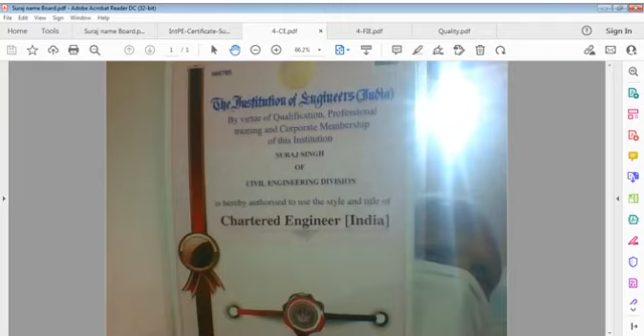I don't claim that these certificates solve every problem. These certificates only indicate identification of some person, and that's what I tell you - this is my only achievement in life. I'm not a very advanced person, not very well internationally or nationally reputed. I'm a very small guy, and why should I say big? I do not get any major awards in my life, but those do not count when quality comes into picture.

When I talk of quality, I talk of soul of world, soul of products, quality in this country and quality elsewhere - we have to consider all that. In our country, everybody knows that quality is not as it should be. It's not seen, it's not experienced, and that's where the problem lies.

In our country, to be very frank, I want to speak something that comes to my mind every day, and every day the mind works differently. But quality remains the same, the level of quality remains the same, you can't change it. Because life is like that, and quality can't be replaced by something else.

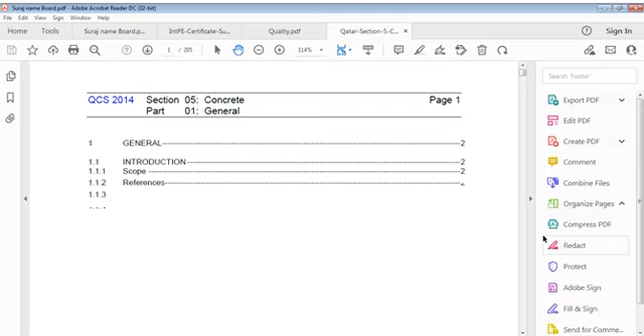Quality requires to be achieved at all levels, and if you can't achieve this, then I can't say that engineers are successful. An engineer may work in design, in planning, in quantification, may work everywhere, anywhere, but remember.

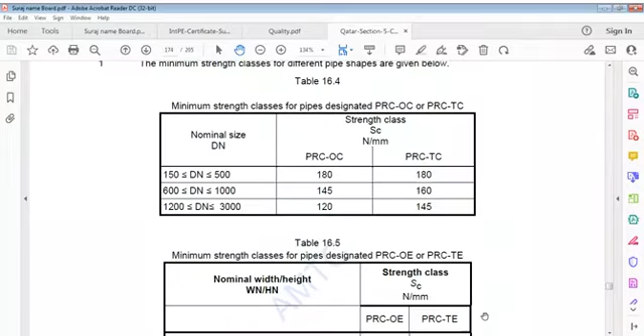Without good designs also, we can't do good work. How can you do designs when you don't know quality? When you don't understand what is quality, how can you do the work? It's a point of concern - we can say a big concern, a point of big concern, and we cannot run away from that fact.

We can say, I'm a design engineer, I'm not interested in quality. Everybody can say that, but don't forget, design is respectable only until it is not implemented on site. It's very much respected because a lot of thought has gone into it before your design is issued, and it's really very much appreciated that the design is excellent. Design takes care of every action on it, every force to come on it, and in all structures.

It takes time, of course. Now it's a computer age - design has the opportunity to be detailed out and tried many times in modeling. But real modeling works on site. We know there are factors of safety we take into consideration.

Factor of safety, which people abuse actually. Those who do not understand the meaning of design, those who don't care about durability of structures, those who don't know that this structure is very important for decades to come - they take it for granted and think let it go on as it is, no problem. We make money. It happens.

I've talked to many people, I've dealt with many people when they come to me, and they used to come to me before also, and they ask me, just give us some idea or give us some layout, don't worry about structural engineering. They simply say don't worry about columns and beams, we'll take care of that, our experts know that. And who are the experts? The experts are masons and carpenters, experienced of course, and they take care of that. So what to do, how to tell people? No, but of course everybody has a small house to construct.

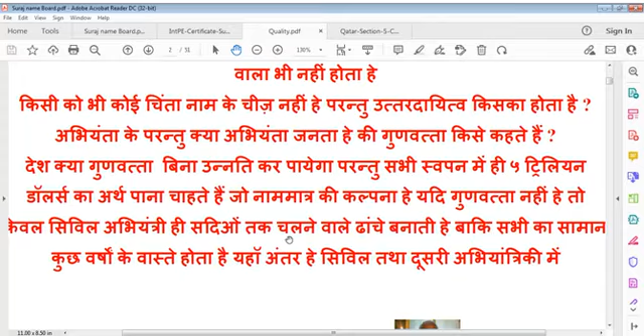Engineer can make good manager. Engineer can make good administrator. But administrator cannot make good engineer, and also manager cannot make good engineer. That is very clear. One experienced engineer can be excellent manager, can be dynamic manager, can be administrator, can be whatever it is, but if seriousness exists.

I don't know why seriousness doesn't work in people. I don't know why culture of our people is different. It should not be. We are very smart people, very dynamic people, and we should know this fact.

Don't take it that I am criticizing engineering community. I am not criticizing anyone. I am trying to bring them to a track that they have lost. And that's a fact that engineers have lost one track. And that track is follow-up of quality, creating quality, showing quality, and not simply certification.

I do not write behind my name, I have so many degrees. No use. My degree is proved by my work. If I cannot prove that, I always raise questions. This means I am incomplete. I have to solve questions after working.

And it is unfortunate that current engineering people, engineering professionals, they don't want to work in sun. They don't want to work on sites. Until you work on sites, you cannot know facts. That's also true.

And engineers should know economy also. Engineers should know budget also. At least you should know if you don't practice. Just checking one item is not enough for calling engineer.

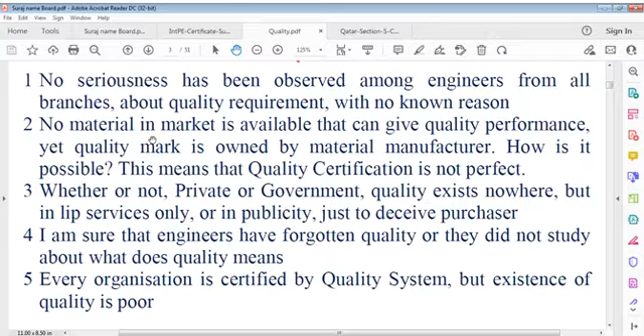You should know everything about your material that you are going to include in designs. You should even tell everyone in writing statement what you have to do, what we think we have to do, and based on that intention we have done this design. That must be seen, but unfortunately this doesn't happen. That's where I can say that we have to change somewhere.

I was talking about concrete in my specifications, actually not my specification, it is some Qatar specification. Say precast concrete we talked of, and I actually forget which page it was, so I don't know which page it was. Polyester in concrete we had gone through, so no need. So structural concrete is talking. In this scope, I talked of work included section comprises furnishing all plants, workers, equipment, appliances, and materials and performing all operations in connection with structural precast concrete work.

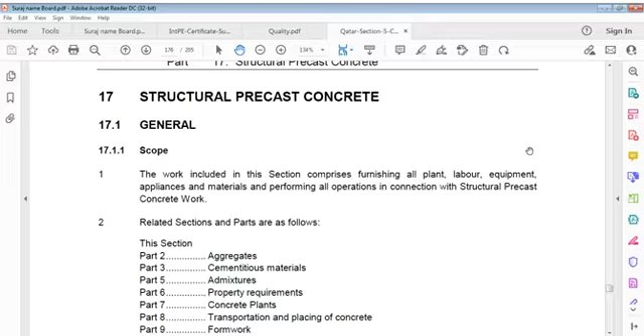And of course, we can say manufacturer's literature. Contractor shall provide copies of manufacturer's specifications and installation instructions for each item of proprietary material to be used. That's also an important point, I'm just noting it.

The work included in this section encompasses furnishing all plant, equipment, workers, appliances, and materials, and performing all operations in connection with structural precast concrete work.

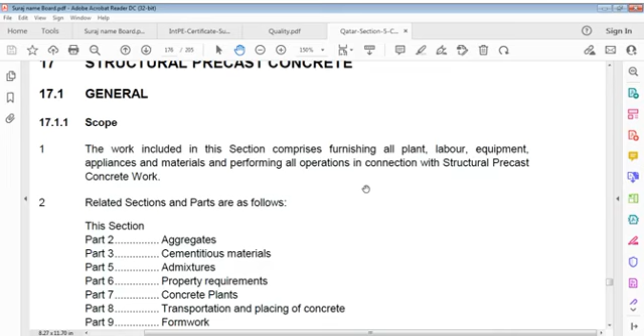Related parts in this specification are aggregates, cementitious material, admixtures, property requirements, concrete plants, transportation and placing of concrete, formwork, flooring, reinforcement, hot weather concreting, and standard specifications for highway bridges section 25, guide for precast cellular concrete floor, roof and wall units, guide for precast concrete wall panels, and design responsibility for architectural precast projects.

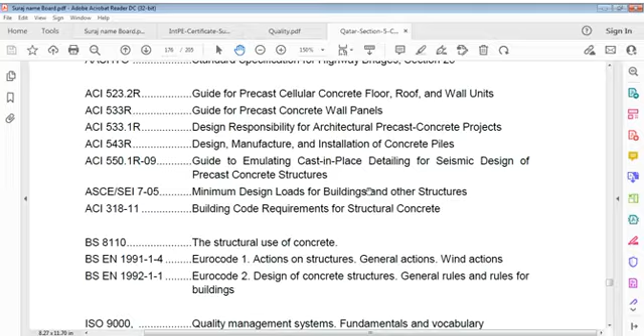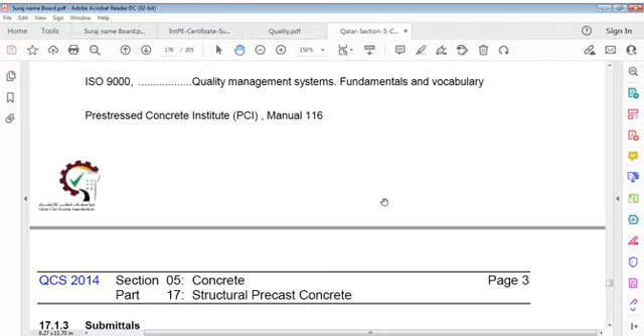Also precast concrete projects covering design, manufacture, and installation of concrete piles, guide to emulating cast-in-place detailing for seismic design of precast concrete structures, minimum design loads for buildings and other structures, building code requirements for structural concrete, structural use of concrete, Eurocode 1 actions on structures - general actions and wind actions, Eurocode 2 design of concrete structures - general rules and rules for buildings, Quality management systems fundamentals and vocabulary, and the Prestressed Concrete Institute manual.

We also have to submit the manufacturer's literature. The contractor shall provide copies of manufacturer's specifications and installation instructions for each item of proprietary material to be used, showing compliance with this specification. Information on equipment, embedded items, and other accessories shall also be provided.

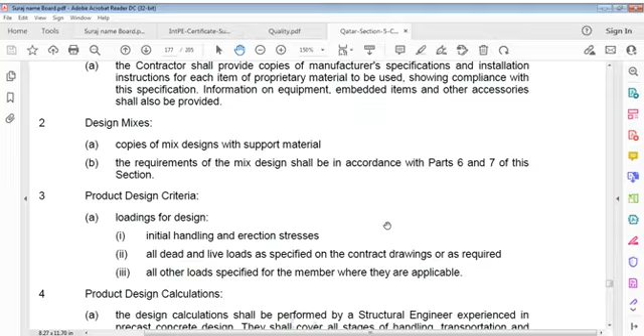Design mixes: copies of mix designs with supporting material. Requirements of mix design shall be in accordance with Part 6 and 7 of this section, as we have said.

Product design criteria: loadings for design, initial handling and erection stresses, all dead and live loads specified on contract drawings or as required, and all other loads or forces specified for members where applicable.

Product design calculations shall be performed by a structural engineer experienced in precast concrete design, and shall cover all stages of handling, transportation, and erection.

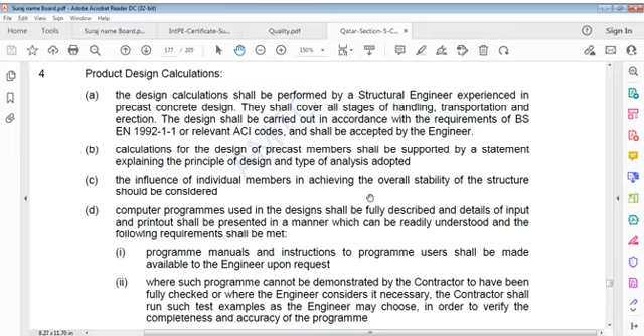Design shall be carried out in accordance with the requirements of BS EN 1992-1-1 or relevant ACI codes and be accepted by the engineer. Calculations for design of precast members shall be supported by a statement explaining the principle of design and types of analysis adopted. The influence of individual members in achieving overall stability of the structure should be considered.

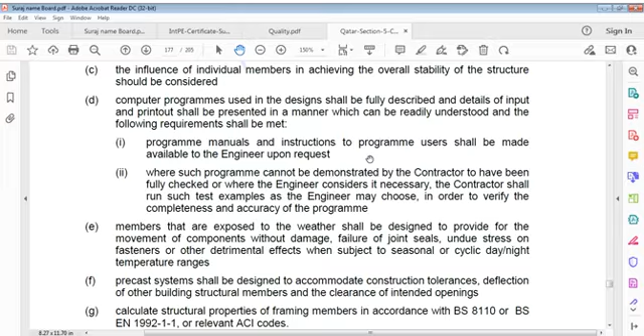Computer programs used in design shall be fully described, and details of input and printout shall be presented in a manner which can be readily understood, and the following requirements shall be met.

Program manuals and instructions for program users shall be made available to the engineer upon request. Where such a program cannot be demonstrated by the contractor to have been fully checked, or where the engineer considers it necessary, the contractor shall run such test examples as the engineer may choose in order to verify the completeness and accuracy of the program.

Members that are exposed to weather shall be designed to provide for movement of components without damage, failure of joint seals, undue stress on fasteners, or other detrimental effects.

When subject to seasonal or cyclic day or night temperature ranges, the precast system shall be designed to accommodate construction tolerances, deflection of other building structural members, and clearance of intended openings.

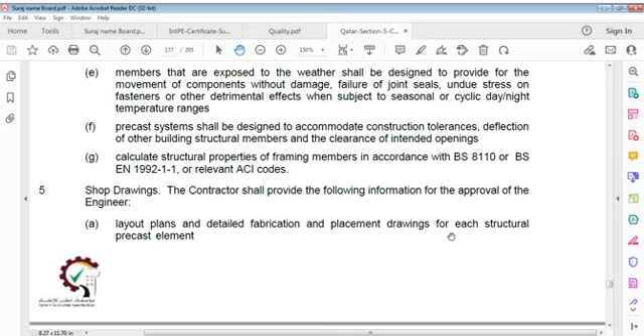Calculate structural properties of framing members in accordance with BS 8110 or BS EN 1992-1-1 or relevant ACI codes.

Shop drawings: the contractor shall provide the following information for approval of the engineer: layout plans and detailed fabrication and placement drawings for each structural precast element. Shop drawings are to include the following information: size, grade, profile, and dimensions of all materials used.

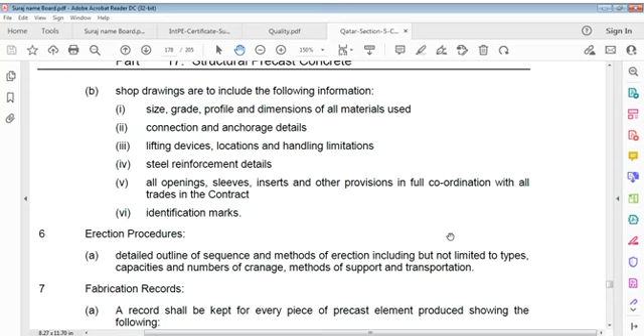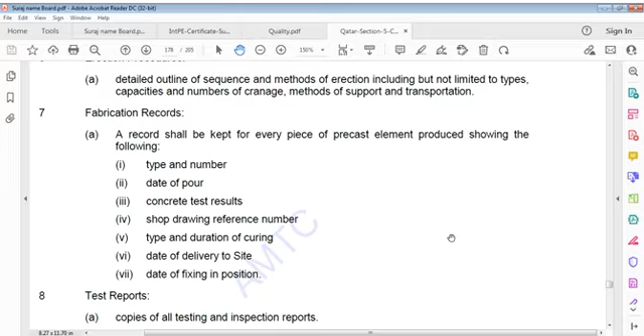Connection and anchorage details, lifting devices, locations and handling limitations, steel reinforcement details, all opening sleeves, inserts, and other provisions in full coordination with all trades in the contract, identification marks, and erection procedure - a detailed outline of the sequence and method of erection, including but not limited to types, capacities, and numbers of craneage, method of support, and transportation.

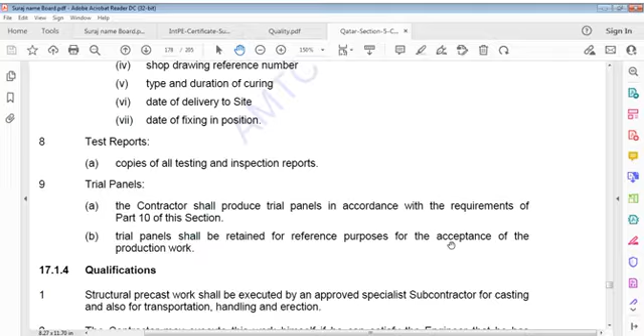Fabrication records: a record shall be kept for every piece of precast element produced, showing the following: type and number, date of pour, concrete test results, shop drawing reference number, type and duration of curing, date of delivery to site, date of fixing in position, test reports, and copies of all testing and inspection reports.

Trial panels: the contractor shall produce trial panels in accordance with the requirements of Part 10 of this section. The trial panel shall be retained for reference purposes for acceptance of production work.

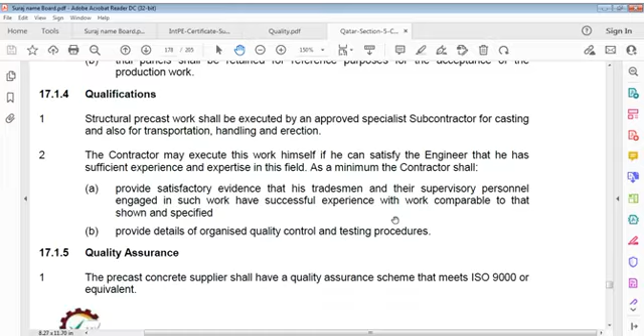Qualifications: structural precast work shall be executed by an approved specialist subcontractor for casting and also for transportation, handling, and erection. The contractor may execute this work himself if he can satisfy the engineer that he has sufficient experience and expertise in this field.

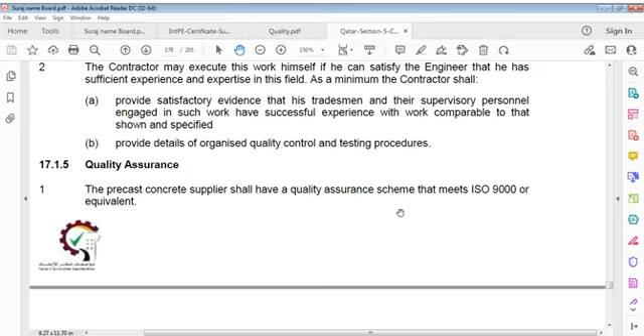At minimum, the contractor shall provide satisfactory evidence that its tradespersons and supervisory personnel engaged in such work have successful experience with work comparable to that shown in the specification, and shall provide details of organized quality control and testing procedures.

Quality assurance: the precast concrete supplier shall have a quality assurance scheme performed to secure for the project homogeneous concrete having the required strength, surface finish, materials, durability, and weathering resistance, without planes of weakness or other structural defects.

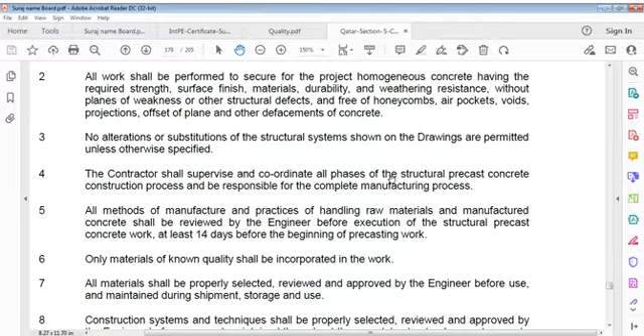And free of honeycombs, air pockets, voids, projections, offset of plane, and other defacements of concrete. No alterations or substitutions of structural systems shown on the drawings are permitted unless otherwise specified.

Contractor shall supervise and coordinate all phases of structural precast concrete construction process and be responsible for complete manufacturing process. All methods of manufacture and practices of handling raw materials and manufactured concrete shall be reviewed by engineer before execution of structural precast concrete work, at least 14 days before beginning of precasting work.

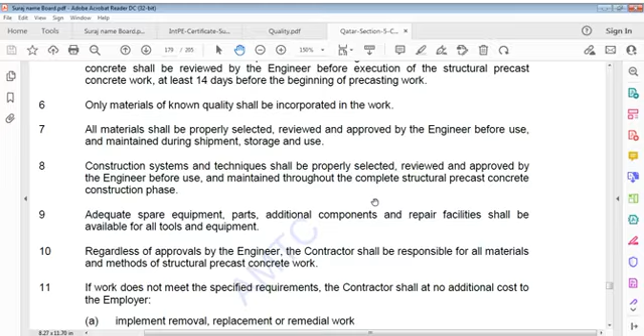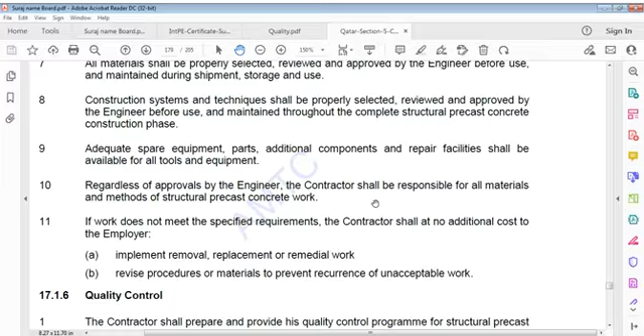Only materials of known quality shall be incorporated in work. All materials shall be properly selected, reviewed and approved by engineer before use and maintained during shipment, storage and use. Construction systems and techniques shall be properly selected, reviewed and approved by engineer before use and maintained throughout the complete structural precast concrete construction phase.

Adequate spare equipment parts, additional components and repair facilities shall be available for all tools and equipment. Regardless of approvals by engineer, contractor shall be held responsible for all materials and methods of structural precast concrete work. If work doesn't meet specified requirements, contractor shall, at no additional cost to employer, implement removal, replacement or remedial works, and revise procedures or materials to prevent the recurrence of unacceptable work.

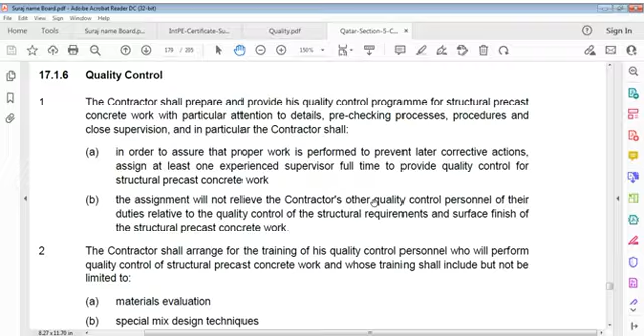Quality issues, quality controls. Contractor shall prepare and provide its quality control program for structural precast concrete work with particular attention to details, pre-checking processes, procedures and close supervision. In particular, contractor shall, in order to assure that proper work is performed and to prevent later corrective actions, assign at least one experienced supervisor, full-time or dedicated, to provide quality control requirements for structural precast concrete work.

This assignment shall not relieve contractor's other quality control personnel of their duties and responsibilities related to quality issues and controls of structural requirements and surface finish of structural precast concrete work.

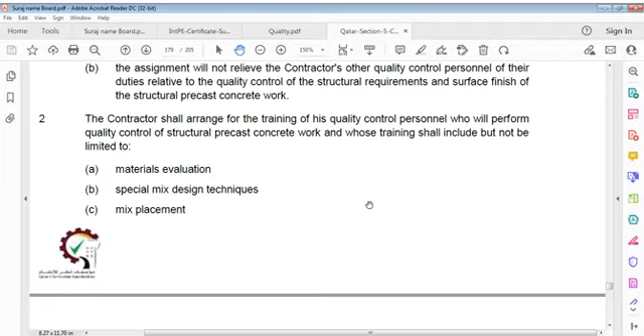Contractor shall arrange for training of its quality control personnel who perform quality control of structural precast concrete work, whose training shall include but not be limited to material evaluation, mix design techniques, mix placement, vibrator selection and use, formwork details, formwork protection, release agent use, reinforcing steel detailing and installation, finishing equipment and techniques, corrective procedures and protection of completed work.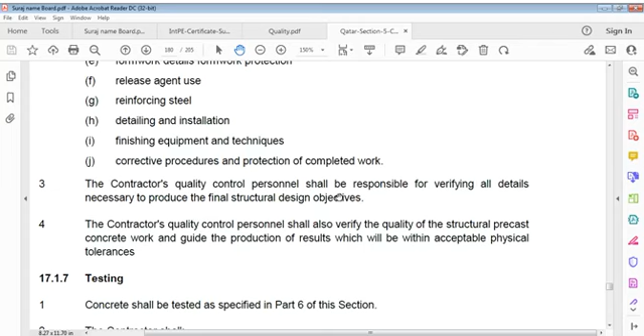Contractor quality control personnel shall be responsible for verifying all details necessary to produce final structural design objectives. Contractor's quality control personnel shall also verify quality of structural precast concrete work and guide production of results which...

Ordinary, but ordinary except that it is done in industry or in a factory.

Testing is very common. Concrete shall be tested as specified in this section, in part 6 or whatever. Contract shall furnish workers required to facilitate testing - that is, of course, specifically trained workers.

Inform engineer with at least one day's advance notice when concrete is to be placed. Provide storage facilities for concrete test cubes. Provide material samples and access to materials as required for testing.

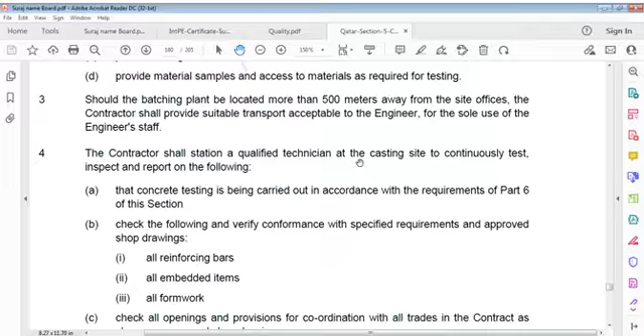Should the batching plant be located more than 500 meters away from the site office, contractor shall provide suitable transport, acceptable to engineer, for sole use of engineer's staff. Contractor shall station a qualified technician at the casting site to continuously test, inspect, and report on the following requirements.

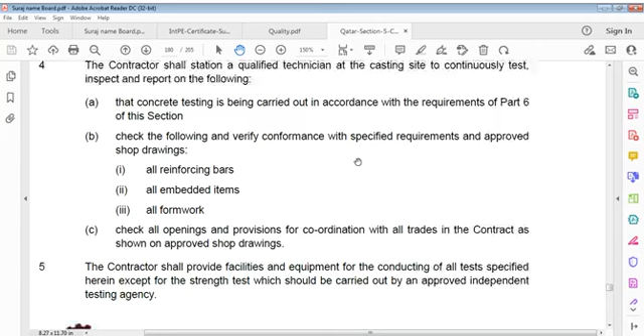The concrete testing is being carried out in accordance with requirements of Part 6 of this section. Check the following and verify conformance with specified requirements and approved shop drawings: reinforcing bars, all embedded items, all formwork. Check all openings and provisions for coordination with all trades in contract as shown on approved shop drawings.

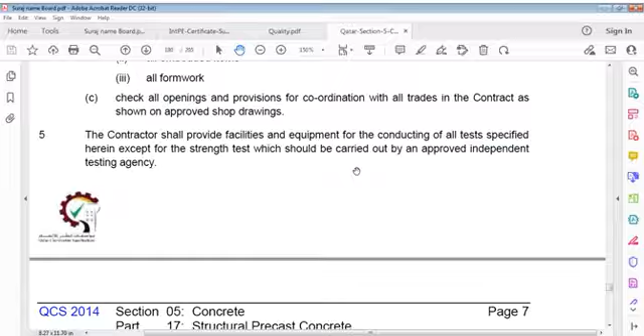Structural precast elements shall be removed from form without damaging or overstressing, and stored or placed for transportation on a stable bed that shall not allow distortion of the member. Generally these are transported using trailers, low-level trailers.

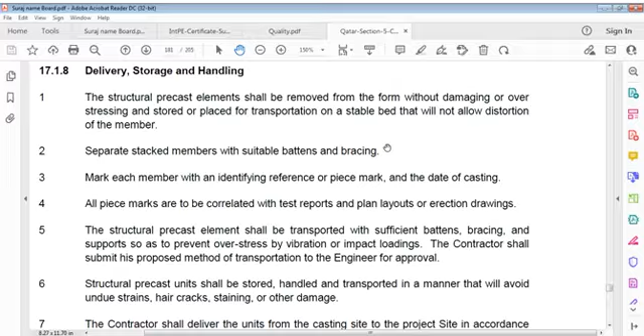Separate stacked members with suitable battens and bracing. Mark each member with an identifying reference or piece mark and date of casting.

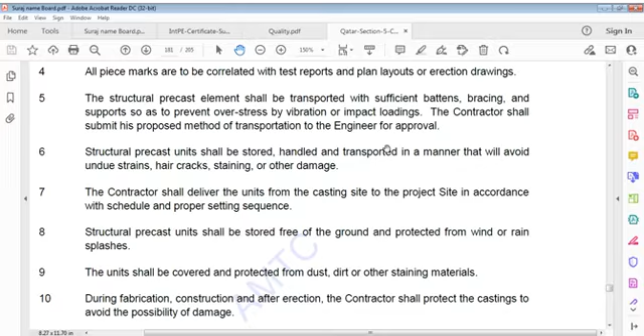All piece marks are to be correlated with test reports and plan layouts or erection drawings. Structural precast elements shall be transported with sufficient battens, bracings and supports so as to prevent overstress by vibration or impact loading. Contractor shall submit its proposed method of transportation to engineer for approval.

Structural precast units shall be stored, handled and transported in a manner that would avoid undue strains, hair cracks, staining or other damage.

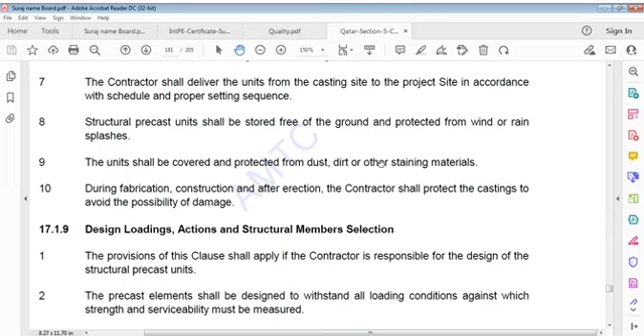Contractor shall deliver units from casting site to project site in accordance with schedule and proper setting sequence. Structural precast units shall be stored free of ground and protected from wind or rain splashes. Units shall be covered and protected from dust, dirt or other staining materials. During fabrication, construction and after erection, contractor shall protect castings to avoid possibility of damage.

I'm interested in giving as much as possible in the shortest time, because this specification of concrete is important for every engineer, and also those who work overseas, because people least concentrate on specifications like concrete. They want to do conventional activities, which is just not going to work the way it should.

I'll come back to design, but let me explain something important because I remember all my history of work, my career. When I started, we did not use all these test controls. These test controls were available, but details were not available to that level.

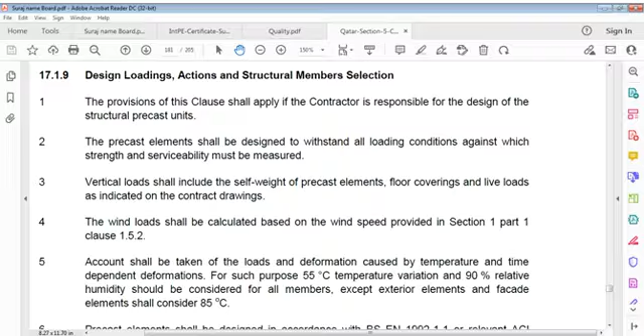Very important point here, this is given: precast elements shall be designed in accordance with BSEN 1992-1-1 or relevant ACI code. Design tensile stresses should not exceed design flexure and tensile stress of concrete at a particular age of concrete. Nominal cover to steel, including links, must meet durability requirements of severe condition of exposure and to meet requirement of 2-hour period of fire resistance, as provided for in BSEN 1992-1-1 or relevant ACI code.

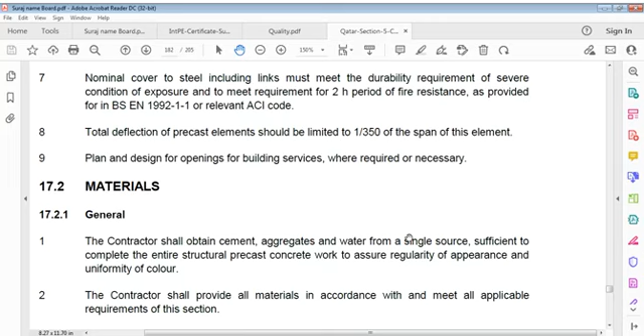Total deflection of precast elements should be limited to 1/350 of span of this element. Plan and design for openings for building services where required or necessary. Materials.

General: contractor shall obtain cement, aggregate and water from a single source - cement from one source, aggregate from one source and water from one source - sufficient to complete the entire structural precast concrete work to assure regularity of appearance and uniformity of color. Contractor shall provide all materials in accordance with and meeting all applicable requirements of this section.

Reinforcing bars shall conform to requirements of part 11 of this section, you can refer to that one. Bearing pads, elastomeric neoprene, conforming to AASHTO Standard Specifications for highway bridges with the following stipulations.

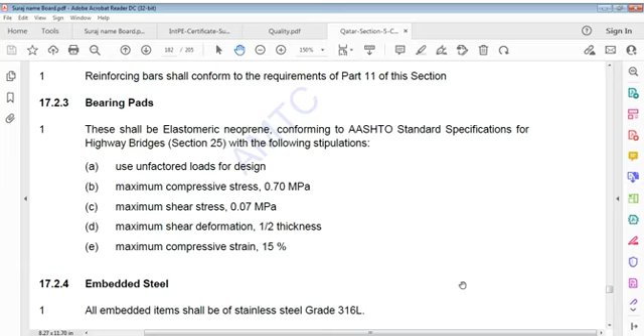Use unfactored loads for design. Maximum compressive stress 0.7 MPa, maximum shear stress 0.07 MPa, maximum shear deformation half thickness, maximum compressive strain 15%. Embedded steel - all embedded steel shall be stainless steel grade 316L. Forming, general.

Forms and casting beds are to be firmly seated so as not to deflect or be displaced under concreting or tensioning loads.

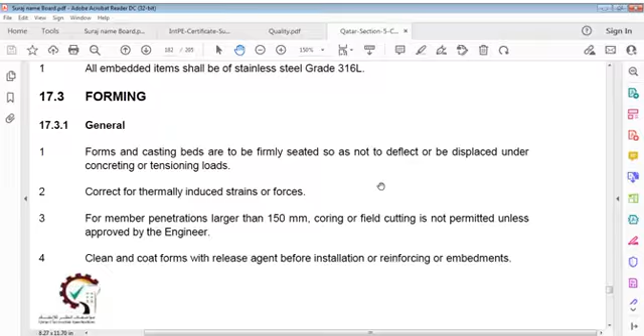Forms and casting beds are to be firmly seated so as not to deflect or be displaced under concreting or tensioning loads.

Correct for thermally induced strains or forces. For members with penetrations larger than 150 mm, coring or field cutting is not permitted unless approved by engineer. Clean and coat forms with release agents before installation of reinforcing or embedments.

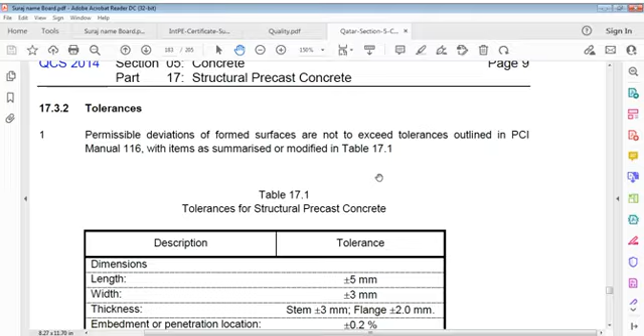Tolerances: permissible deviations of formed surfaces are not to exceed tolerances outlined in the PCI manual. length plus minus 5 mm, width plus minus 3 mm, thickness plus minus 3 mm, flange plus minus 2 mm, embedment or penetration location plus minus 0.2%, straightness plus minus 3 mm per 300 centimeter, and squareness plus minus 3 mm.

Installation: contractor's erection responsibilities include safe and proper placing, aligning and leveling of structural precast elements on accepted bearing surfaces and affecting their proper fastenings.

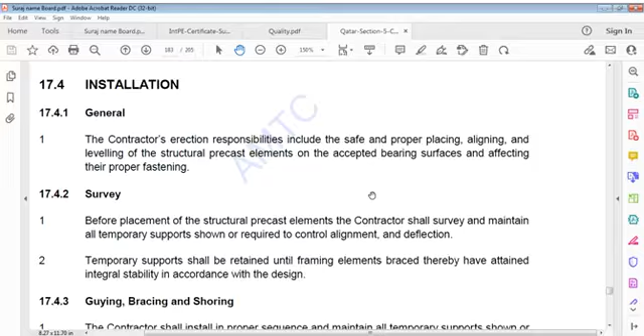Before placement of structural precast elements, contractor shall conduct survey and maintain all temporary supports shown or required to control alignment and deflection. Temporary support shall be retained until framing elements braced thereby have attained integral stability in accordance with design.

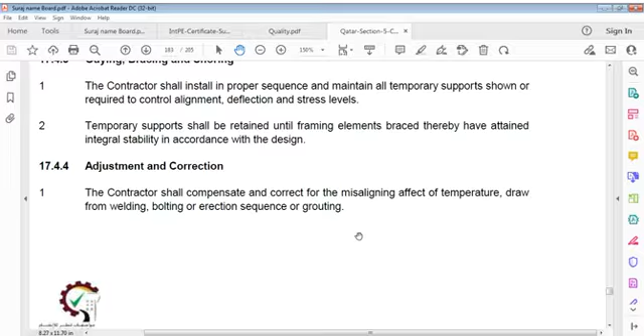Guying, bracing and shoring. Contractor shall install in proper sequence and maintain all temporary supports shown or required to control alignment, deflection and stress level. Temporary support shall be retained until framing elements braced thereby have attained integral stability in accordance with design.

Adjustments and correction: contractor shall compensate and correct for misalignment, effect of temperature, draw from welding, bolting or erection sequence, or grouting.

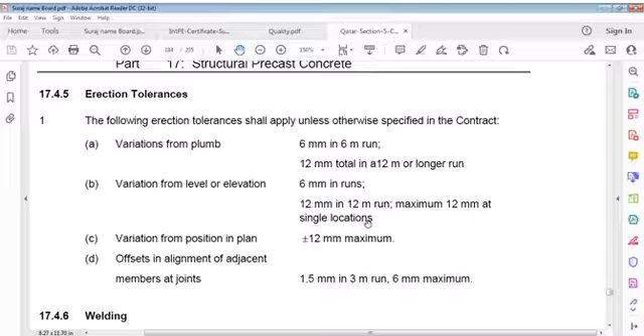Erection tolerance: the following erection tolerances apply unless otherwise specified in contract. Variation from plumb, 6 mm in 6 meter run, 12 mm total in a 12 meter or longer run. Variation from level or elevation, 6 mm in run, 12 mm in 12 meter run, maximum 12 mm at single location for elevation.

Variation from position in plan plus minus 12 mm maximum. Offsets in alignment of adjacent members at joints: 1.5 mm in 3 meter run, 6 mm maximum.

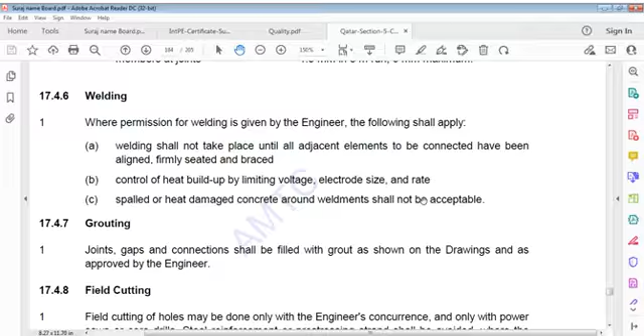Welding: where permission for welding is given by engineer, the following shall apply. Welding shall not proceed until all adjacent elements to be connected have been aligned, firmly seated and braced. Control heat buildup by limiting voltage, electrode size and rate. Spalled or heat damaged concrete around weldment shall not be accepted.

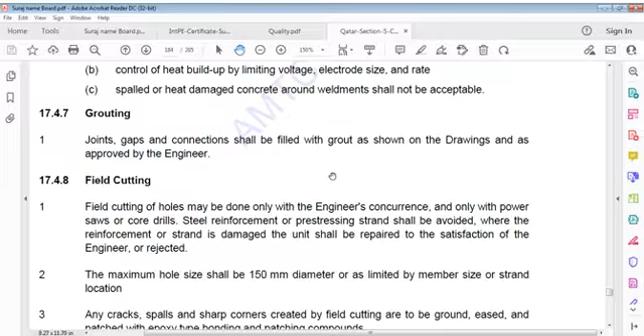Grouting of joints and connections shall be filled with grout as shown on drawings and as approved by engineer.

Field cutting of holes may be done only with engineer's concurrence and only with power saws or core drills. Steel reinforcement or pre-stressing strand damage shall be avoided. Where reinforcement or strand is damaged, unit shall be repaired to satisfaction of engineer or rejected. Maximum hole size shall be 150 mm diameter, or as limited by member size or strand location.

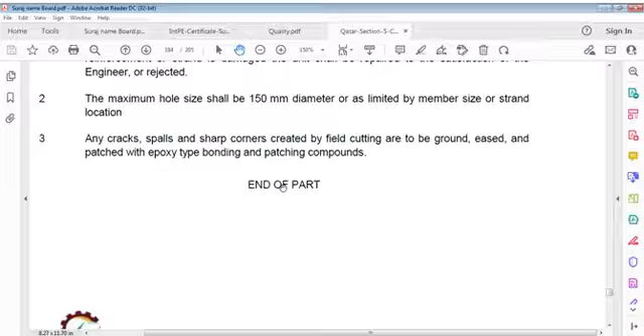Cracks, spalls and sharp corners created by field cutting are to be ground, eased and patched with epoxy type bonding and patching compounds.

Pre-stressed concrete. Here we have general scope, references, submittals, storage and handling, as usual.

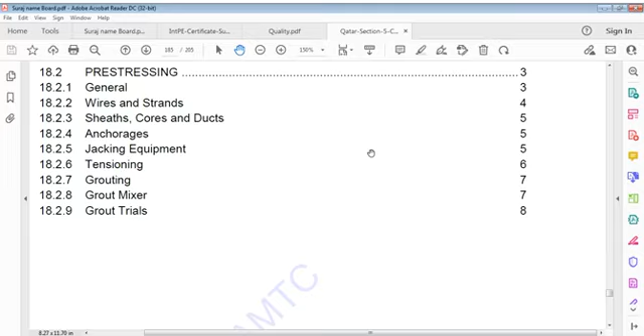In pre-stressing, general topics include wires and strands, sheaths, cores and ducts, anchorages, jacking equipment, tensioning, grouting, grout mixer, grout trials, and pre-stressed concrete.

This scope describes requirements for pre-stressed post-tension concrete, including materials and procedures for installation, stressing and grouting.

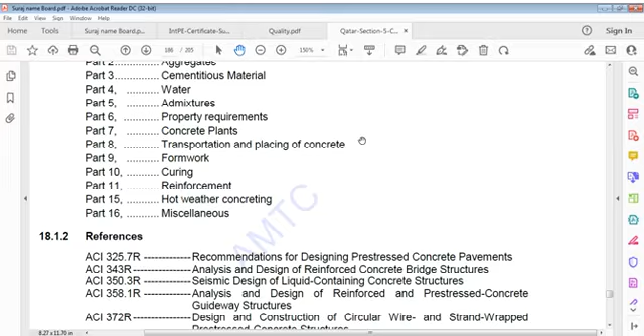It relates to many sections: aggregates, cementitious material, water, admixtures, property requirements, concrete plants, transportation and placing of concrete, recommendations for designing pre-stressed concrete pavements, analysis and design of reinforced concrete bridge structures, seismic design of liquid containing concrete structures, analysis and design of reinforced and pre-stressed concrete guideway structures, design and construction of circular wire and strand wrapped pre-stressed concrete structures, and design and construction of circular pre-stressed concrete structures with circumferential tendons.

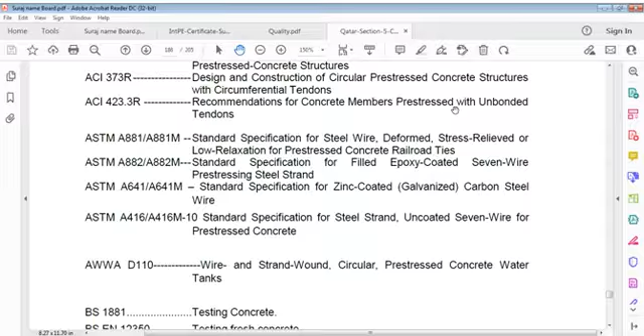Other related sections include recommendations for concrete members pre-stressed with unbonded tendons, standard specifications for steel wire deformed stress relieved or low relaxation for pre-stressed concrete railroad ties, standard specifications for filled epoxy coated 7-wire pre-stressing steel strand, standard specifications for zinc coated carbon steel wire, standard specifications for steel strand uncoated 7-wire for pre-stressed concrete, wire and strand wound circular pre-stressed concrete water tanks, testing concrete, testing fresh concrete, testing hardened concrete, specification for high tensile steel wire and strand for pre-stressing concrete, Eurocode for design of concrete structures, and testing of concrete.

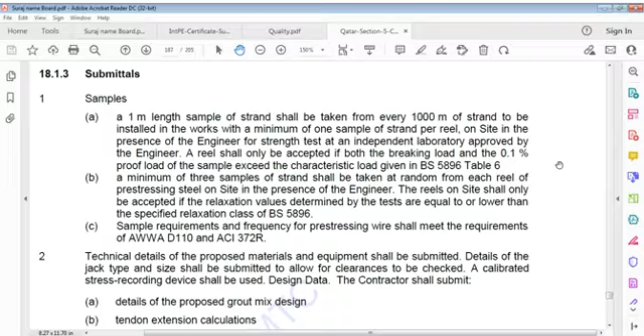Sample requirements and frequency for pre-stressing wire shall meet requirements of AWWA D110 and ACI 372R. Technical details of proposed materials and equipment shall be submitted. Details of jack type and size shall be submitted to allow for clearances to be checked. A calibrated stress recording device shall be used.

Design data contractor shall submit: details of proposed grout mix design, tendon extension calculations, vent pipe spacing and location details, detailed execution and shop drawings, and calculation notes.

Other submittals: contractor shall also submit curriculum vitae and experience record of proposed supervisor, who must have a minimum of 5 years experience in such a position. Safety procedures including warning signs, barricades, and communication between different stressing locations. Name of proposed pre-stressing company, giving details of previous projects, storage and handling.

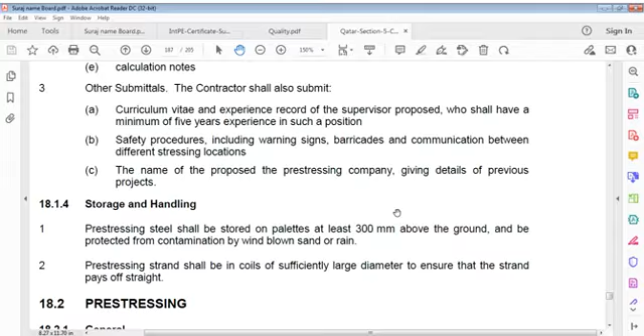Pre-stressing steel shall be stored on pallets at least 300 mm above ground and be protected from contamination by wind-blown sand or rain. Pre-stressing strand shall be in coils of sufficiently large diameter to ensure that strand pays off straight.

Pre-stressing operation shall be carried out only under direction of an experienced and competent supervisor, and all personnel operating stressing equipment shall have been properly trained in its use.

In addition to normal precautions against accidents, care should be taken at all times for the whole works. Special care shall be taken when working with or near tendons which have been tensioned or are in the process of being tensioned. The system of pre-stressing used shall be a system approved by engineer.

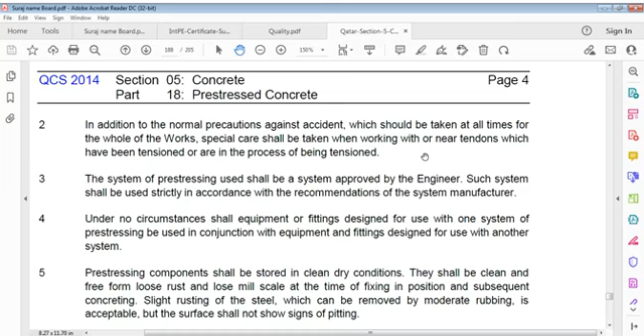Such system shall be used strictly in accordance with recommendations of the system manufacturer. Under no circumstances shall equipment or fittings designed for use with one system of pre-stressing be used in conjunction with equipment and fittings designed for use with another system. Pre-stressing components shall be stored in clean, dry conditions, and shall be clean and free from loose rust and loose mill scale at time of fixing in position, and subsequent concreting.

A slight rusting of steel, which can be removed by moderate rubbing, is acceptable, but the surface shall not show signs of pitting. Regarding wires and strands: all pre-stressing strands shall be 7 wire super stabilized low relaxation strands.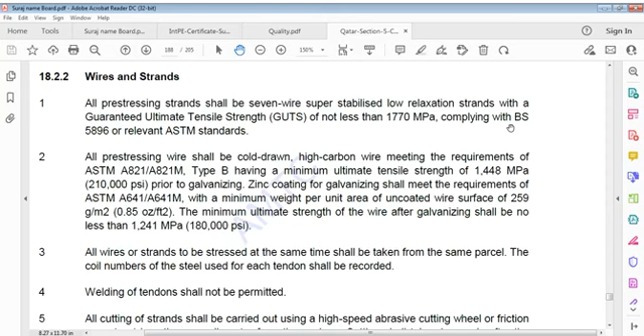Prior to galvanizing, zinc coating for galvanizing shall meet requirements of ASTM A641M, with a minimum weight per unit area of uncoated wire surface of 259 gram per meter square. Minimum ultimate strength of wire after galvanizing shall be no less than 1241 MPa. All wires or strands to be stressed at the same time.

Wires shall be taken from the same parcel, and coil numbers of steel used for each tendon shall be recorded. Welding of tendons shall not be permitted. All cutting of strands shall be carried out using a high-speed abrasive cutting wheel or friction saw at not less than 1 diameter from the anchor.

Cutting shall take effect only after the contractor has submitted stressing records and the engineer has approved them in writing. Flame cutting shall not be permitted.

Tendons shall be built into the works strictly in accordance with the system being employed. Sufficient strand shall project from the anchorage to allow jacking to take effect at the stressing end of the tendon.

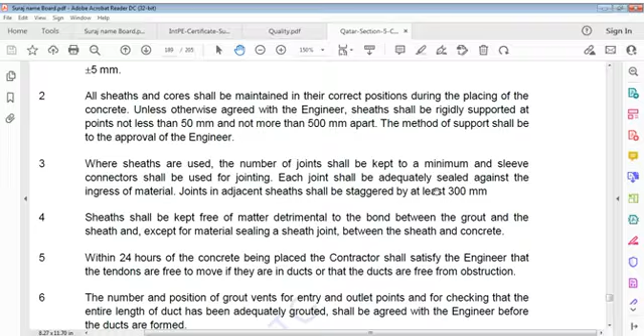Sheaths shall be kept free of matter detrimental to the bond between grout and sheath, except for material sealing a sheath joint between sheath and concrete.

Within 24 hours of concrete being placed, the contractor shall satisfy the engineer that tendons are free to move if they are in ducts, or that the ducts are free from obstruction.

Number and position of grout vents for entry and outlet points, and for checking that the entire length of duct has been adequately grouted, shall be agreed with engineers before ducts are formed.

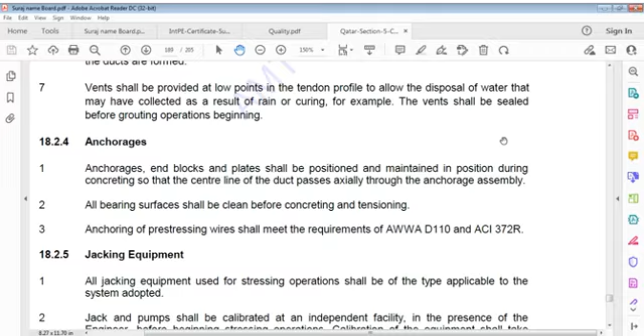Anchorages, end blocks and plates shall be positioned and maintained in position during concreting, so that the center line of the duct passes axially through the anchorage assembly.

All bearing surfaces shall be cleaned before concreting and tensioning. Anchorage of pre-stressing wires shall meet the requirements of AWWA D110 and ACI 372R.

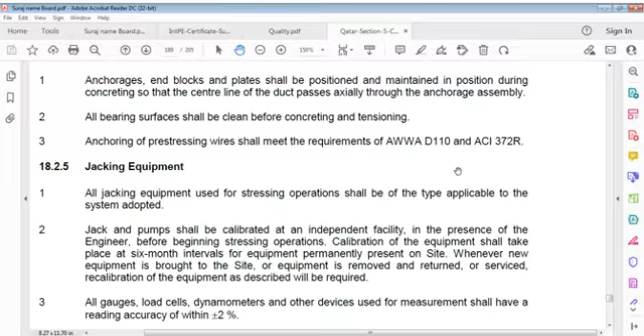Jacking equipment. Jacks: all jacking equipment used for stressing operations shall be of the type applicable to the system adopted. Jacks and pumps shall be calibrated at an independent facility in the presence of engineers before beginning stressing operations.

Calibration of equipment shall take effect at 6-month intervals for equipment permanently present on site. Whenever new equipment is brought to site, or equipment is removed and returned, or serviced, recalibration of equipment as described shall be required.

All gauges, load cells, dynamometers, and other devices used for measurement shall have a reading accuracy within plus minus 2%.

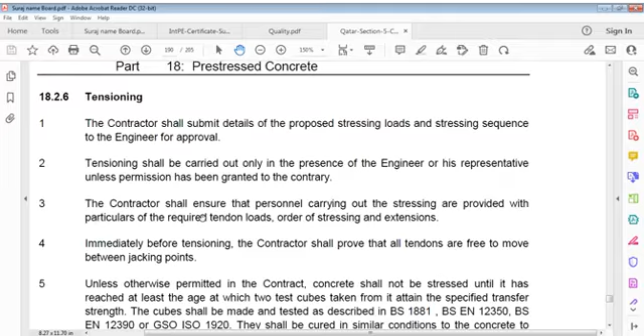Tensioning shall be carried out only in the presence of the engineer or their representative, unless permission has been granted to the contrary. The contractor shall ensure that personnel carrying out stressing are provided with particulars of required tendon loads, order of stressing, and extensions. Immediately before tensioning, the contractor shall prove that all tendons are free to move between jacking points.

Unless otherwise permitted in the contract, concrete shall not be stressed until it has reached at least the age at which two test cubes taken from it attain the specified transfer strength.

Unless otherwise permitted in contract, concrete shall not be stressed until it has reached at least the age at which two test cubes taken from it attain specified transfer strength. Cubes shall be made and tested as described in BS 1881, BSEN 12350, etc. They shall be cured in similar conditions to the concrete to which they relate, in a manner approved by the engineer.

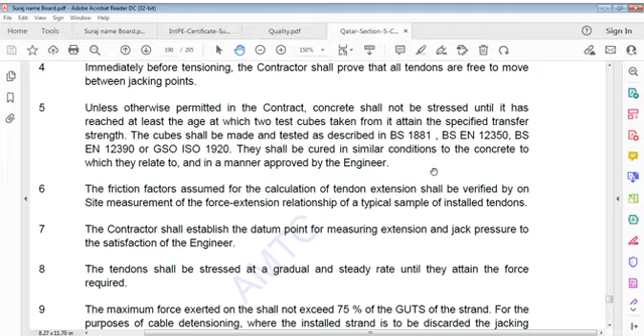Friction factors assumed for calculations of tendon extensions shall be verified by on-site measurement of the force extension relationship of a typical sample of installed tendons. The contractor shall establish a datum point for measuring extension and jack pressure to the satisfaction of the engineer.

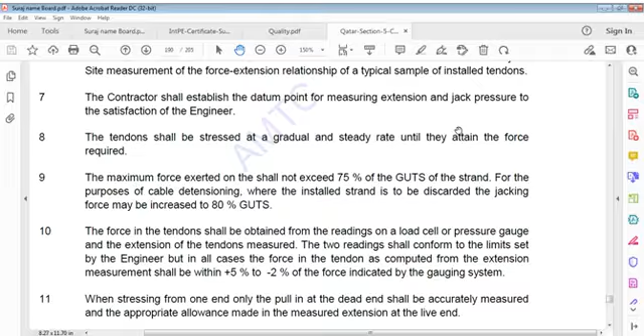Tendons shall be stressed at a gradual and steady rate until they attain the force required. The maximum force exerted shall not exceed 75% of the guaranteed ultimate tensile strength. For purposes of cable detensioning, where the installed strand has to be discarded, jacking force may be increased to 80% of GUTS.

The force in tendons shall be obtained from readings on a load cell or pressure gauge, and the extension of tendons measured. The two readings shall conform to limits set by the engineer, but in all cases force in the tendon as computed from extension measurement shall be within plus 5% to minus 2% of the force indicated by the gauging system.

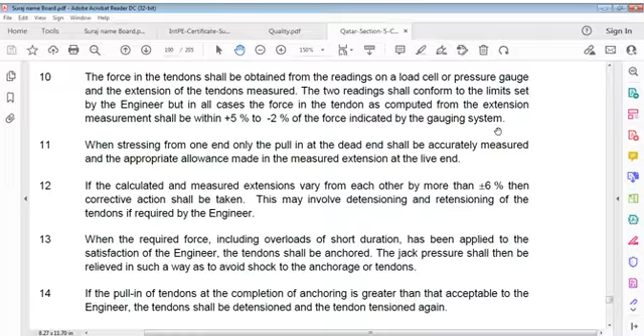When stressing from one end only, pull-in at the dead end shall be accurately measured and appropriate allowance made in the measured extension at the live end. If calculated and measured extensions vary from each other by more than plus or minus 6%, corrective action shall be taken.

This may involve detensioning and retensioning of tendons if required by the engineer. When the required force, including overloads of short duration, has been applied to the satisfaction of the engineer, the tendon shall be anchored.

Jack pressure shall then be relieved in such a way as to avoid shock to the anchorage or tendons. If a pull-in of tendons at completion of anchoring is greater than acceptable to the engineer...

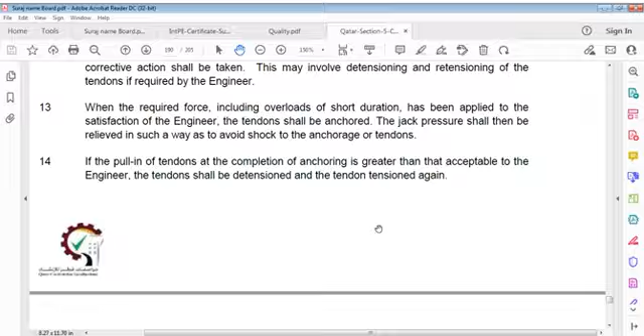the engineer may direct that the force in any tendon be tested by rejacking. This will only be instructed if there is doubt that the calibration of tensioning equipment is accurate. Care shall be exercised by the contractor during retensioning to ensure that the jacking load does not exceed more than 80% of the GUTS of the strand.

If it is necessary to crop a tendon to enable the duct to be grouted, this shall be delayed as long as practicable up to the time of grouting. In all other cases, unless otherwise agreed with the engineer, the tendon shall not be cropped less than 3 days after grouting.

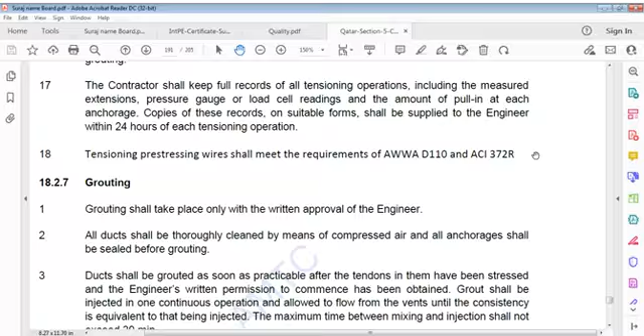The contractor shall keep full records of all tensioning operations, including measured extensions, pressure gauge or load cell readings, and the amount of pull-in at each anchorage. Copies of these records on suitable forms shall be supplied to the engineer within 24 hours of each tensioning operation. Tensioning of prestressing wires shall meet the requirements as stated.

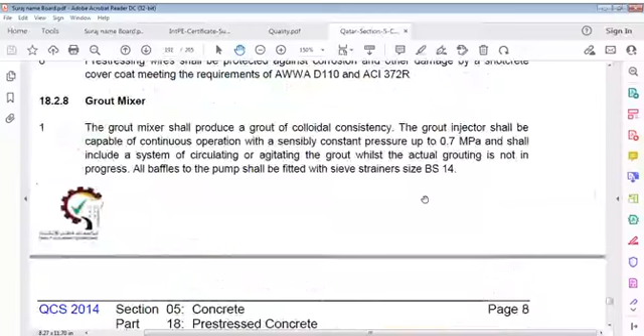Grouting. We will take up testing of water retaining structures a little later, because it's a very important point. We are talking of concrete specifications, and we are talking of something which is very important.

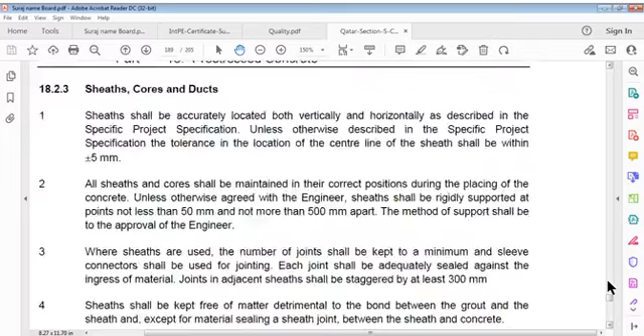This tensioning system involves jack equipment, anchorages, sheath cores and ducts, wires and strands, and pre-stressing. We have to understand these facts clearly, and really it's not that easy as we think it is. We have to consider these facts very smartly in a way that it doesn't harm us, and it's an important fact, what is done in engineering, particularly in concrete.

We cannot take it for granted. You may say, certainly, because what do I understand by this? Concrete is very important, and this is talking about pre-stressed concrete, which is much more important, also very professional and very technical, and it may not be taken for granted at all. It cannot be taken for granted because it's a very important part of engineering and works, and we may say that it is a very important part, and we cannot take it for granted in any way, whatsoever.